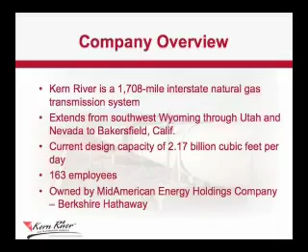Kern River is an interstate natural gas transmission system. We currently operate 1,708 miles of pipe, extending from southwest Wyoming through Utah and Nevada to Bakersfield, California. Our current design capacity is 2.17 billion cubic feet per day. We have 163 employees, the majority working at our office in Fort Union area, just off I-215 at the 6200 South exit. We're owned by MidAmerican Energy Holdings Company, part of Berkshire Hathaway, which purchased us about 10 years ago.

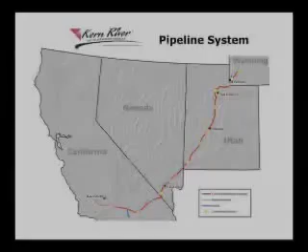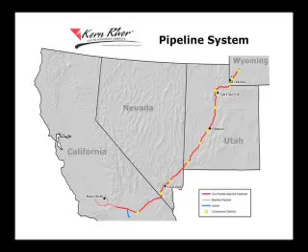This is a map of our system. Our receipts are primarily up in Wyoming. We do have a receipt point from Questar at this compressor station below Salt Lake City at Elberta. We deliver gas to the refineries, several places to Questar, and to the West Valley Power Plant. We have several deliveries throughout southern Utah, supply numerous power plants in the Las Vegas area, and deliver most of the gas to their distribution company, Southwest Gas. We also have numerous industrial and distribution company deliveries in California.

We've been in operation since 1992. In 2003, we built an expansion that looped almost the entire system, so now we have two parallel 36-inch diameter lines, with the exception of a little piece through the city of Las Vegas. Our maximum allowable operating pressure is 1,333 pounds per square inch gauge. We are a large diameter, high pressure gas transmission line.

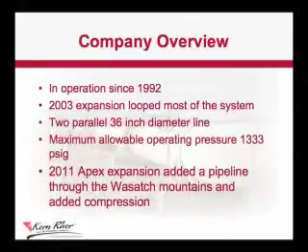We just completed what we call an Apex expansion, finishing the loop through the Wasatch Mountains. Many of you may have noticed you can see the right-of-way from the freeways. We'll be doing additional restoration work, planting shrubs and trees to blend the edges of the right-of-way and make that disappear if we can.

We're also currently working, if you drive I-15 north, on grouting the crossing. We've had a little bit of settling there, so you may notice a little dip as you go up that freeway. We hope to get that fixed within the next couple of weeks so that won't be any further problem.

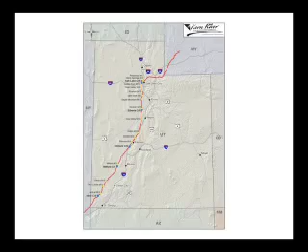This is a more detailed map. We come down Chalk Creek to Coalville, across north of East Canyon, across the Wasatch Mountains. Then we come down out of the mountains around the south edge of North Salt Lake. We cross US-89 and I-15 right by the Chevron refinery, just south of the I-215 interchange. We come through the off-highway vehicle park, across I-215, across the north side of the airport, then turn south across I-80. Just south of that point we have a Salt Lake compressor station.

We then turn west again between the R.C. Willey warehouse and the LDS Church warehouse over to just west of 5600 West. Then we follow the utility corridor all the way down through the valley. We're west of I-15 the rest of the way through the state.

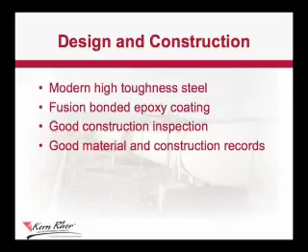Some of the important things about us are, at 20 years old, we are a relatively young pipeline. We've got modern technology, modern high-toughness steel, good specifications, good quality control. We have fusion bonded epoxy coating, still I think the best coating system going. We had good construction inspection. We have good materials and construction records.

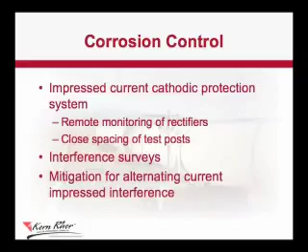Corrosion control is the next big thing for pipeline safety. We operate impressed current cathodic protection. We have remote monitoring of our rectifiers so that we know if something goes wrong very quickly, and don't have to wait for a bi-monthly check. We have, in populated areas, relatively close spacing for our cathodic protection test posts, more detailed than many pipelines. We've done detailed interference surveys, both with other underground utilities and for AC-induced interference. We've installed a lot of mitigation for that AC-induced interference to prevent a corrosion problem from it. We have a lot of that in the Salt Lake Valley.

A very important item, we are on a 4-year cycle for integrity assessments. We have done 2 complete assessments of our system. In conjunction with that, we have hundreds of pipe examinations. We do a minimum of 5 digs for each inline inspection run to calibrate and verify, so we know a lot about what's going on with our pipe and what we have in the ground. The next reinspection for this area will be next year, running from the Salt Lake compressor station the next segment south.

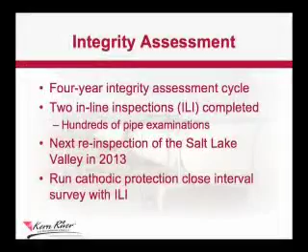In conjunction with that inline inspection, we run close interval cathodic protection inspection, which gives us a lot of detail and helps us do a good job operating that corrosion control system.

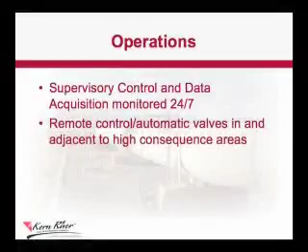We have what we call a supervisory control and data acquisition system. SCADA is the acronym, but it's the remote control and monitoring. It's manned round the clock all of the time. The gas control room is in our office at the Fort Union area. We have remote control and automatic valves, both in all of the high consequence areas and adjacent to them. This was another big item - you've heard a little about it today, but in the San Bruno incident, it's the speed to shut the system down, and we have pretty good coverage in that respect.

Damage prevention is the next big item. We fly the pipeline at least twice per month. We do daily patrols in areas that have very much development, especially the south end of the Salt Lake Valley. In Las Vegas, we drive the pipeline every day, at least weekdays, looking for activity we may not know about if someone hasn't done a one call. We do maintain our cover, surveying the depth of cover along with other integrity assessments and repairing it if it's decreased for some reason.

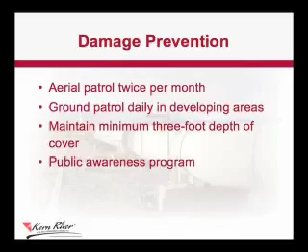We have an enhanced public awareness program that includes some supplemental communications and supplemental messages. This has been talked about quite a bit in the last couple of presentations and will be discussed more tomorrow. This is the place that the public really can help us - if you see activity around our pipeline without Kern River trucks there, please give us a call. But the biggest item, as has been said, is to call 811 before you do any work.

We were asked to talk about the seismic hazards. This probably should have been up in the design section of the presentation, since that's when this was really addressed. All of the faults in the area were studied in quite a bit of detail before the line was originally built. The route selection depended on avoiding some of them where it could. It ended up with 4 faults that we crossed that required special design for the earthquake hazard, and one of those is the Wasatch Fault here.

That design consists of over-excavation - an extra 14 feet excavated around the pipeline. As was mentioned for Questar, it has select backfill, non-cohesive soil, sand and gravel, so that the pipe can move through it more easily. It has heavier wall steel - thicker wall, but lower yield strength, really about the same strength, but a little more flexible and can move a little easier.

That design, the way we model it now, is capable of moving or accommodating a 12.5 foot movement on the Wasatch Fault and still let us stay safely within the stress levels at full maximum allowable operating pressure. Of course, if there was an event, we would have to evaluate very quickly what the real movement was. We also have strain gauges on the line there so that we can monitor and tell what the earthquake has done to the fault.

Liquefaction is the other part of the earthquake design. For us, the liquefaction areas are basically where we hit the valley floor at the Chevron refinery through to about the Salt Lake compressor station. We do have heavy wall pipe installed throughout that entire area, and our design shows that it's adequate to stand the lateral soil separation, either axial or perpendicular to the pipeline.

So that's our design, and that's my presentation. Thanks.